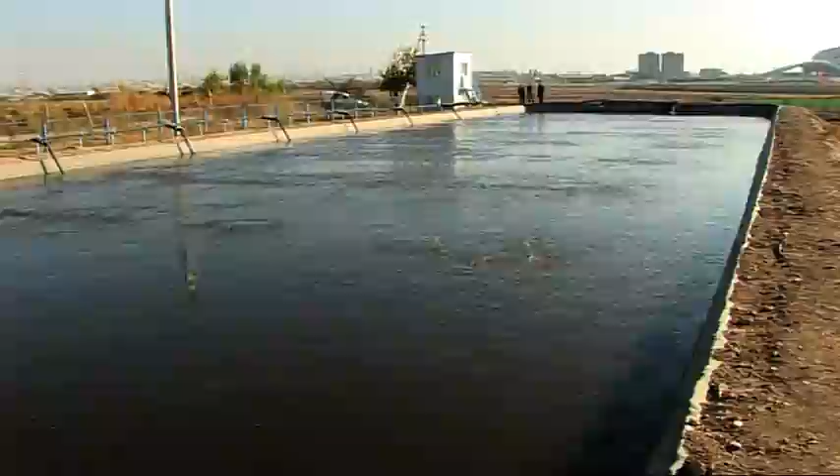We are now in Parakar community of Armavir region, where a non-conventional domestic wastewater treatment system was constructed within the framework of the Global Environment Facility Small Grants Program and community funding. Domestic wastewater treatment allows restoring of degraded community farmlands and protecting underground water resources.

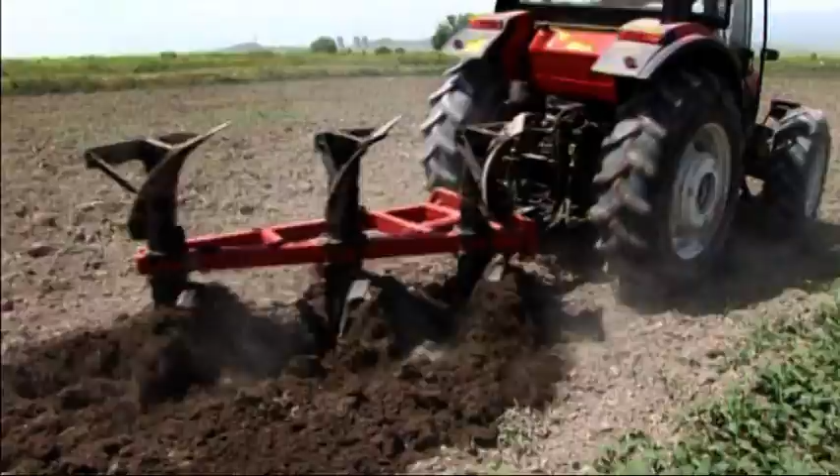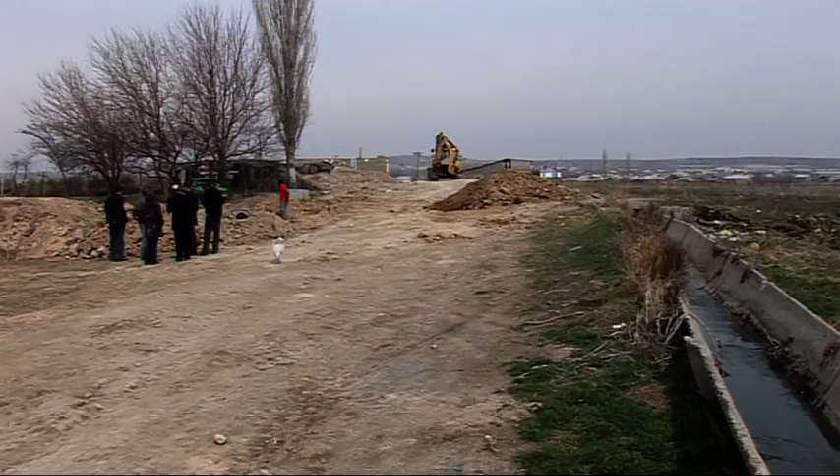The local population is mainly employed in the service sector. All of them have privatized agricultural lands, of which only 5% is cultivated. The remaining agricultural lands are not tilled and exposed to degradation from year to year. The main reason for that is pollution of irrigation water by domestic wastewater.

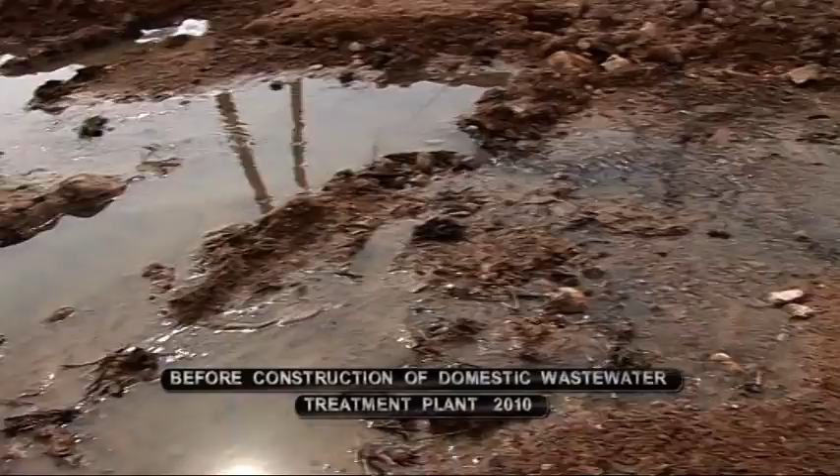Parakar community, which has about 10,000 residents, is connected to sewerage system. That is, it has collectors and wastewater system. However, in the past, wastewater was pumped to the treatment plant of Yerevan by means of 2 pumps. Those pumps have not operated since the independence. The pump stations are completely destroyed and not subject to repair. Wastewater is fully spilled into the village.

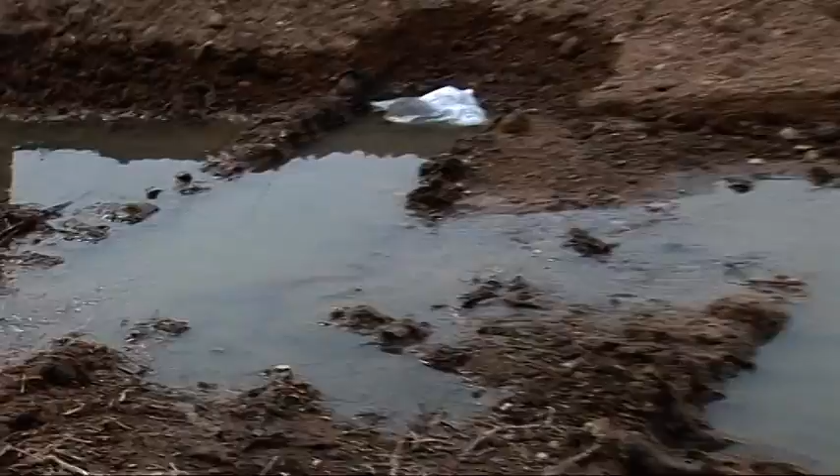It passes through the village, fills into the irrigation system, irrigation canals, and because of this, considerably large agricultural lands are not irrigated. These lands degrade and remain uncultivated. Along with pollution of irrigation water, stench, unsanitary conditions exist in the village. And that was the reason that with the initiative of the mayor, as well as Parakar Foundation, it was proposed to jointly implement this project within the framework of Global Environment Facility Small Grants Program.

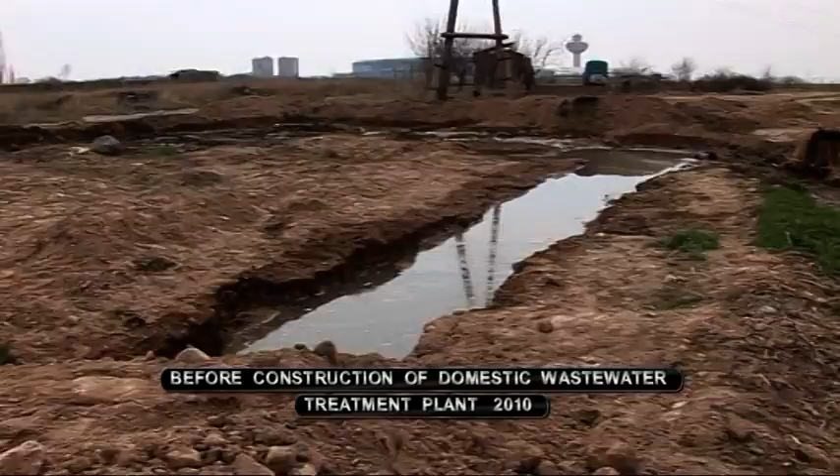For many years, the irrigation canal has been almost fully filled with sediments from wastewater. The latter often flowed out the canal to adjacent areas, making foul odor and anti-sanitary conditions. I have been living here for 27 years. This situation was present since the moment I came here. I have been cleaning the canal, the manholes all the time, with a shovel in my hand to clear out the water. There is no salvation.

It is very unpleasant for me as a resident. This sewerage wastewater, especially when the days become warmer, this foul odor has terrible impact on people, children. Even the children are going to school through this foul odor, the wastewater. It is very unpleasant. We would like this sewerage to be treated, which is the best option.

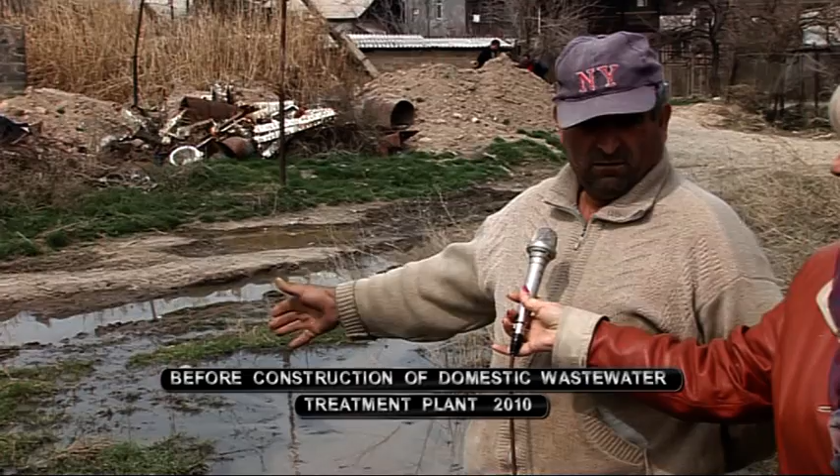It is already 30 years with this situation of the sewerage. After the revolution, we have the same story every time. And this sewerage has caused damage first of all to me. All my trees have withered. Please go into the yard and see the situation there. It's terrible, horrific. All I had totally dried out. I invested so much there and everything dried out.

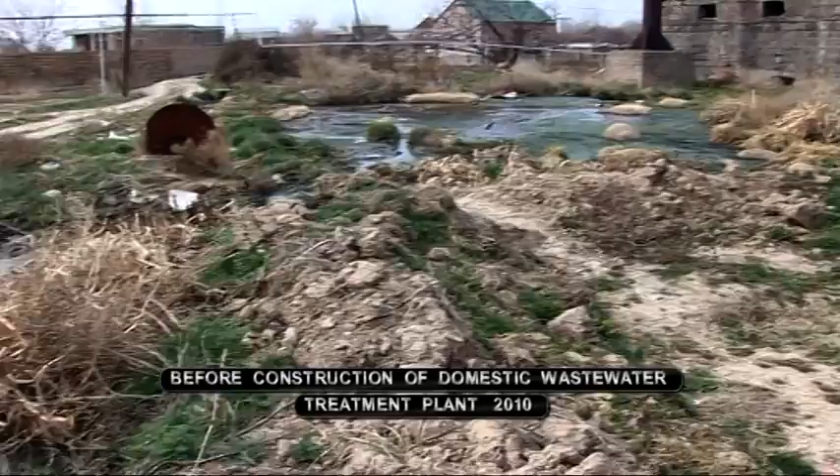Well, you know, it is really a disgraceful situation in the sense that we have such a lake directly adjacent to the school, and you can see yourself what is in it. In fact, the entire wastewater of the upper part of the village is filled into the area of the village school. Of course, it continues its way to the houses downstream, which are still in the same condition. But the school, we now have about 500 pupils, and our students, teachers, parents have to face this impurity every minute. Here you can see through this place our children come to school, just near this dishonor.

The critical situation seriously worried the community head and the administration, since, after mixing of the domestic wastewater with irrigation water, the latter was not used for irrigation purposes, and about 100 hectares of agricultural lands remained uncultivated.

Flowing out the irrigation canal, the wastewater contaminated the cultivated lands, degraded qualitative indicators of the lands, and jeopardized food safety of the population. During summer, wastewater in the community environment posed a real risk for breakout of intestinal and epidemic diseases.

For that reason, as early as 2010, the community head Samvel Vartanyan, in partnership with Parakar Benevolent Foundation and Country Water Partnership NGO, initiated and developed a demonstrative pilot project for domestic wastewater treatment.

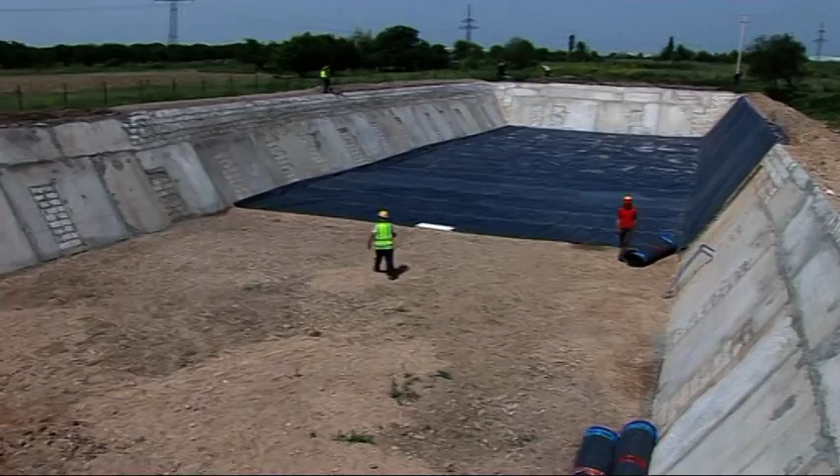The project implied application of a lagoon type of wastewater treatment system for the first time in Armenia, which has a broad application abroad and is relatively cost-effective. This wastewater treatment technology was adapted for Armenian conditions, and the treatment structures were designed by Ginge Engineering Consulting Company.

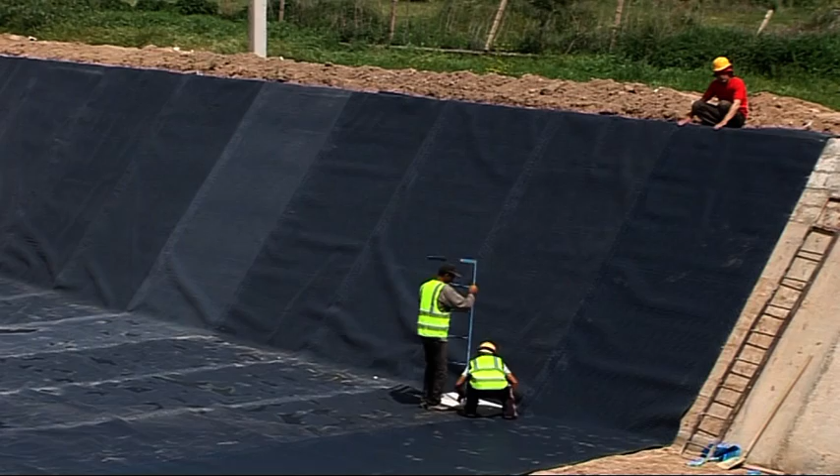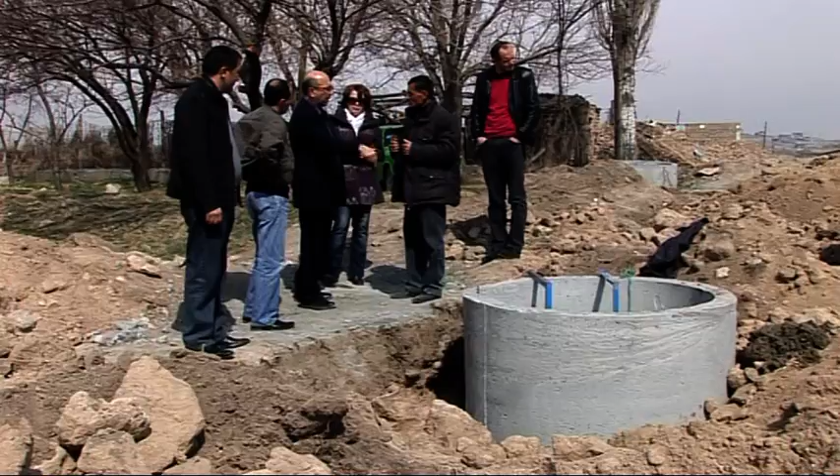It was a very pleasant surprise when in 2010 the Country Water Partnership NGO invited us to take part in the Parakar Wastewater Treatment Plant design project within the framework of Global Environment Facility Small Grants Program. We accepted the invitation with pleasure and started to work.

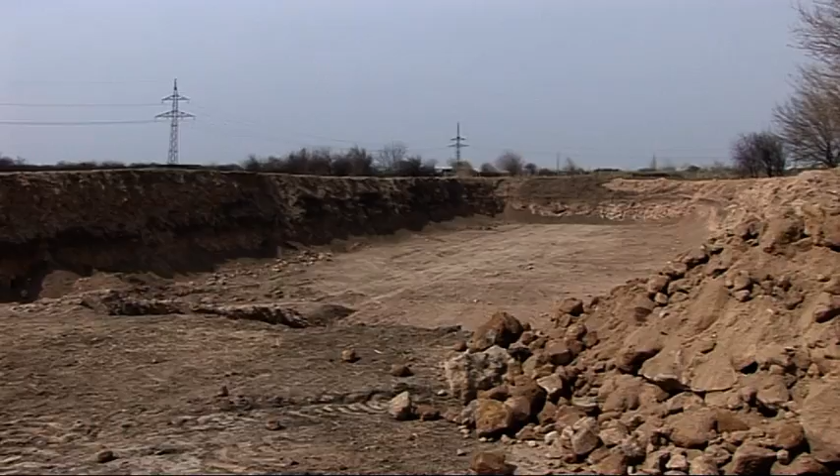Our experts studied the land area allocated for Parakar wastewater treatment plant, its sizes, area, location on the plan, and other data such as wastewater flow, the extent of the community sewerage system, and most importantly, the purposes of wastewater use after treatment. After analyzing the received information and our data, we proposed to apply biological treatment lagoon ecotechnology for Parakar, which envisaged wastewater treatment in 2 biological lagoons.

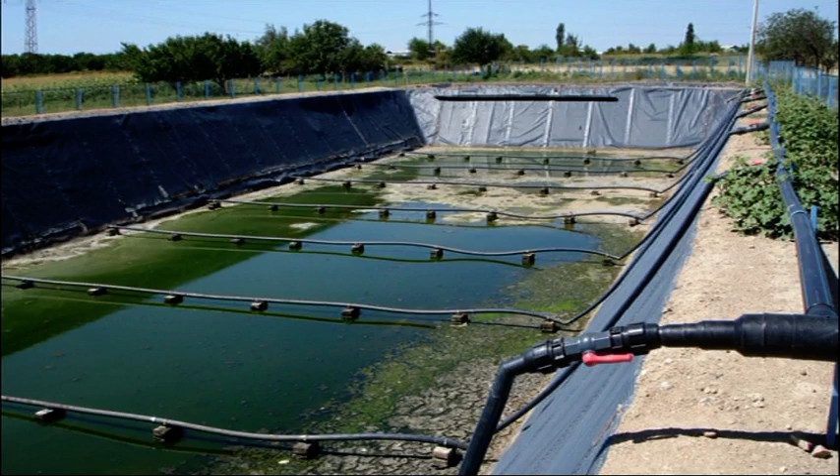Therewith, the treatment would be with artificial aeration in the first lagoon and with natural aeration in the second lagoon, where the settling process would be mainly implemented. The plant would have also certain auxiliary structures such as pump station, air blower station, air distribution system, etc.

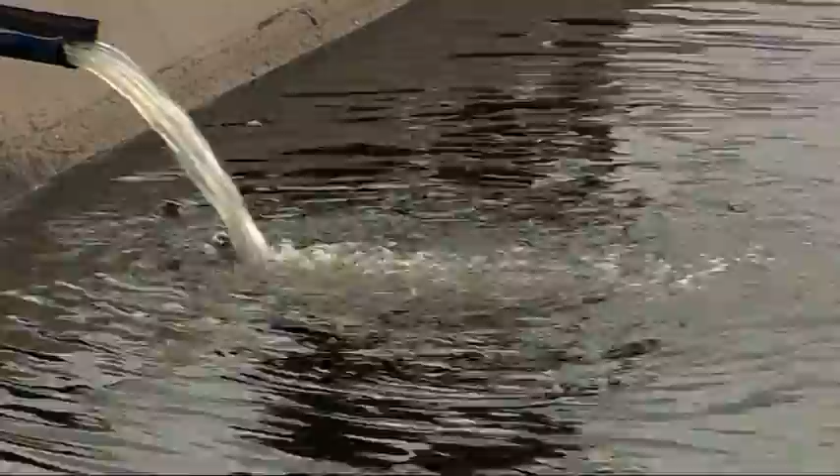It's worth mentioning that all organizations taking part in the project have attached importance to this initiative and made monetary and in-kind contributions to the project. And this is probably the only project within the framework of UNDP GEF Small Grants program where the community's monetary contribution makes about 80% of the total project budget.

Since 2001, at different times, we have applied to the government of the Republic of Armenia and different non-governmental organizations. We applied to allocate funds from the state budget to restore the previously existing system. But it required a huge amount of money. Even only to change the pipeline, an amount exceeding $1.5 million was required.

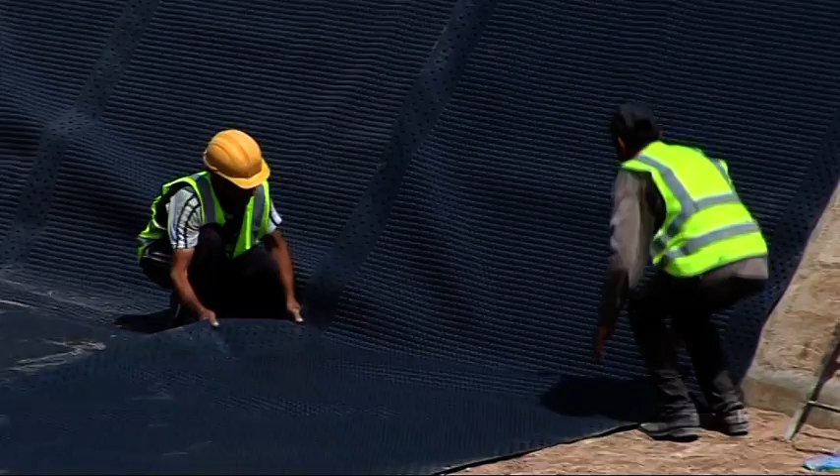And since 2009, we have already started to look for other possible ways to solve the problem of community wastewater disposal and treatment. In 2009, after consultation with Mr. Yerityan, the Community Association President, and Mr. Mesropian, Director of Ginch Company, we decided to construct biological lagoons by which it is possible to treat the wastewater of our entire community.

The works started in 2010, and today we can already proudly say that we are the first in Armenia that have a treatment plant, the operation of which will make the village free from stench, from loading the irrigation canals with wastewater, and as you can see, our neighboring areas are not cultivated.

The lands have not been cultivated quite a long time because of the irrigation water being not available. We used to have the best grape orchards here, good pear orchards, and now there is nothing left. But we can already see a small green area in our neighborhood because the water is already there, and the water is everything for villagers.

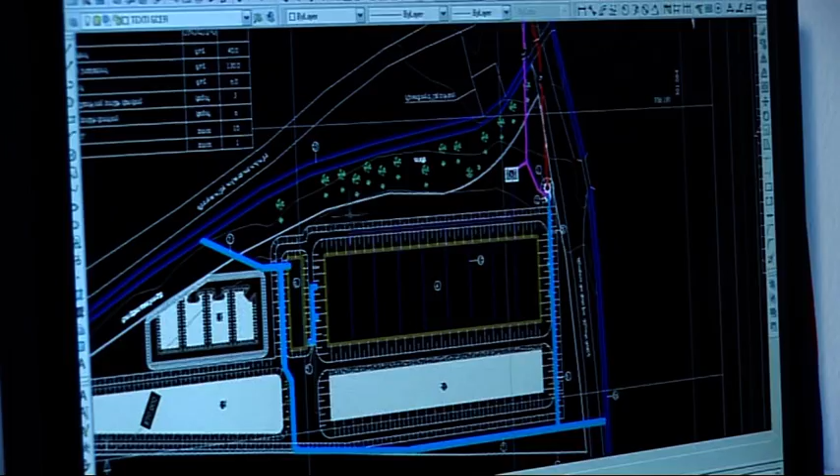This project is of great importance for Parakar community because it solves a number of problems such as environmental, health and socio-economic. Thus, as a result of the project implementation, the wastewater flow into the environment, including agricultural lands, which were not developed in the past for this reason, will be excluded.

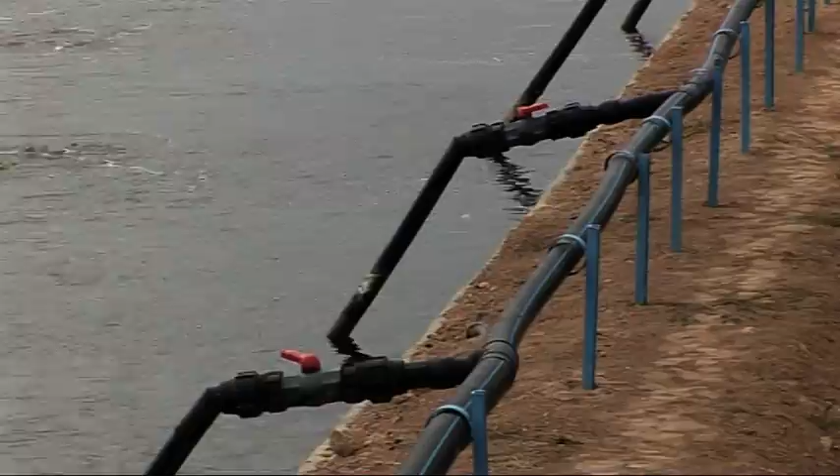Unlike the option developed under the general plan of the community, according to which the domestic wastewater of the community would be pumped to the collector of Yerevan's southwestern district and then removed to Aeration wastewater treatment plant with preliminary estimated value of $1.5 million, this approach is rather inexpensive and more acceptable from the environmental point of view.

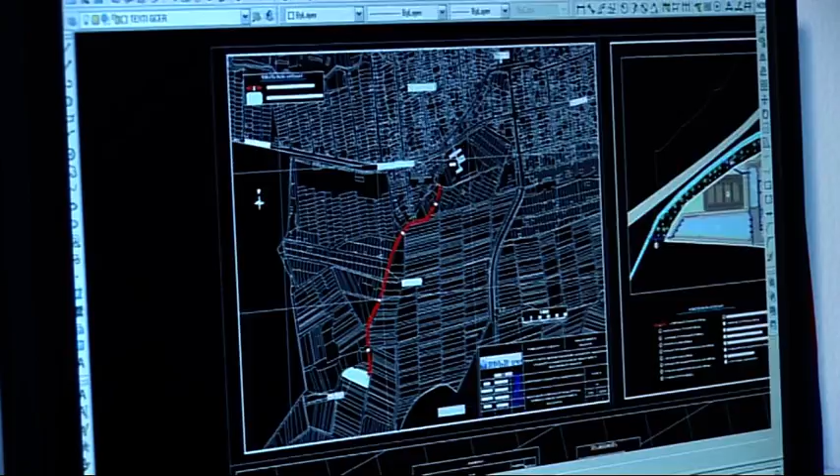The goal of the project is to collect, remove the community's domestic wastewater and to treat the wastewater, making its quality in conformity with the requirements for irrigation water. With this purpose, a sewerage collector with around 1 kilometer total length was constructed, as well as 2 observation chambers at the end of the collector, one of which serves for the metal screen and the other for submerged pumps.

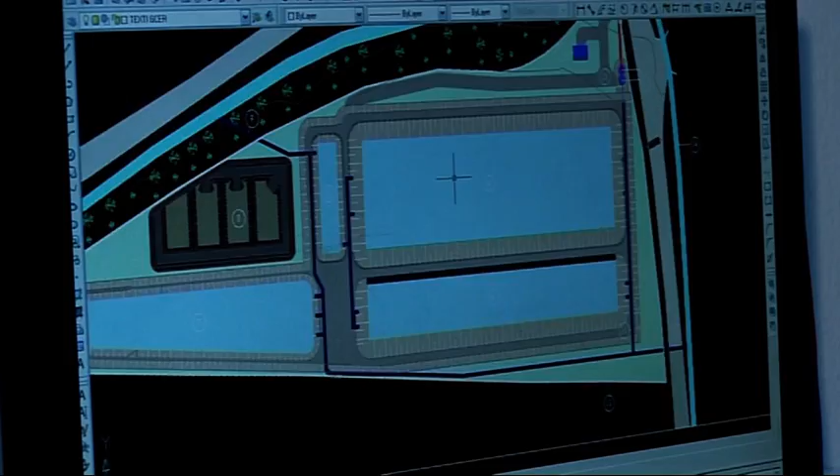Wastewater is treated from relatively large particles by means of screen and is pumped up to 6 meters by pumps. After being pumped to 6 meter height, wastewater flows into biological treatment lagoons through distribution system. There are 2 treatment lagoons. In one of them, artificial aeration takes place, and in the other one, natural aeration and settling of particles, removing the treated wastewater to irrigation canals.

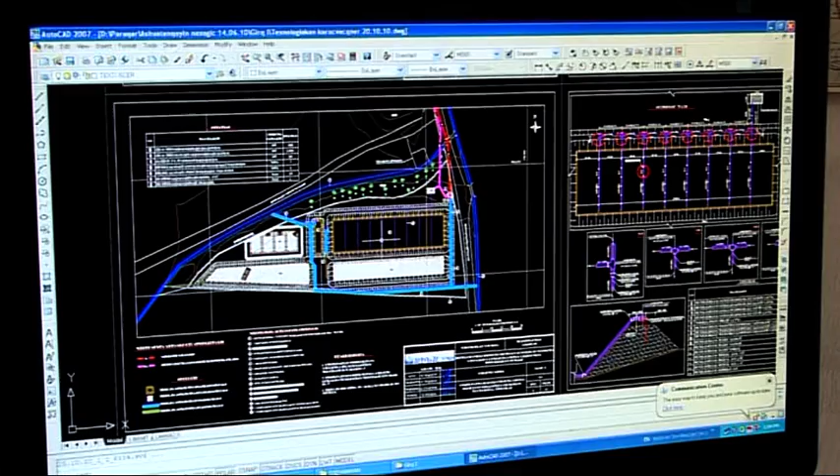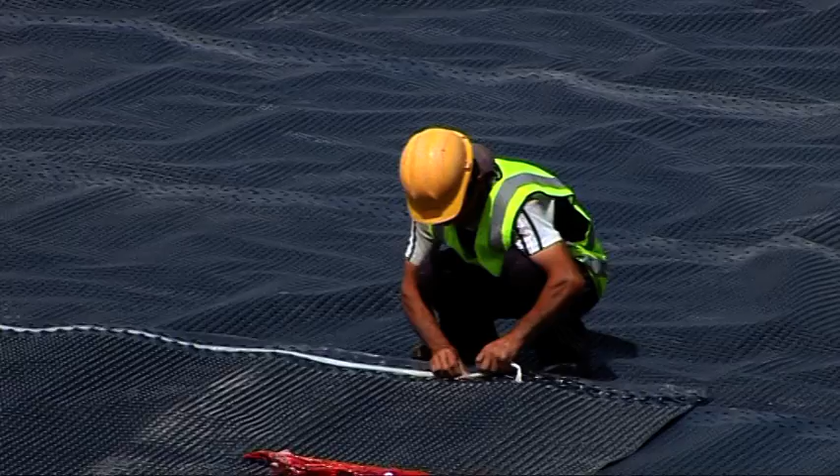The biological lagoons are earth structures with natural basement, and accordingly 3,500 and 100 cubic meters operating capacity. In order to prevent wastewater filtration, the floors and walls of the lagoons are isolated by means of water-repellent polymer membrane, with appropriate development of the walls and floor. Wastewater flow from the first lagoon to the second one is implemented through the collecting canal, and the flow from the second lagoon to the irrigation canals, through pipes.

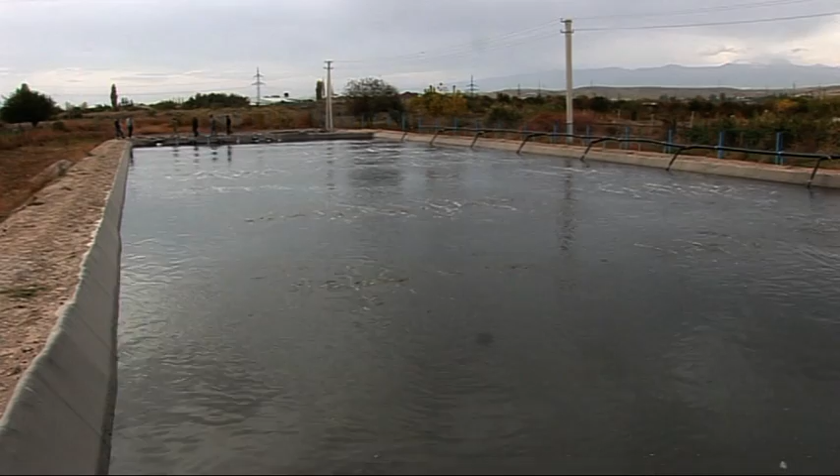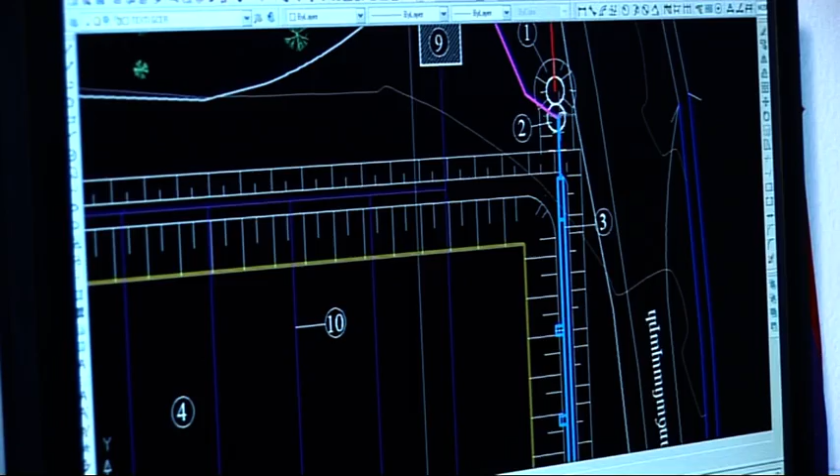As I mentioned, for increasing the wastewater treatment efficiency, it was planned to carry out artificial aeration through air blowers. For this purpose, a two-story building was constructed within the plant area, in the first floor of which the air blowers are installed, while the second floor serves for the operating staff. By means of air blowers, the air is blown through polyethylene pipes to the distribution network installed at the bottom of the biological lagoon, representing perforated pipes located at certain distance from each other.

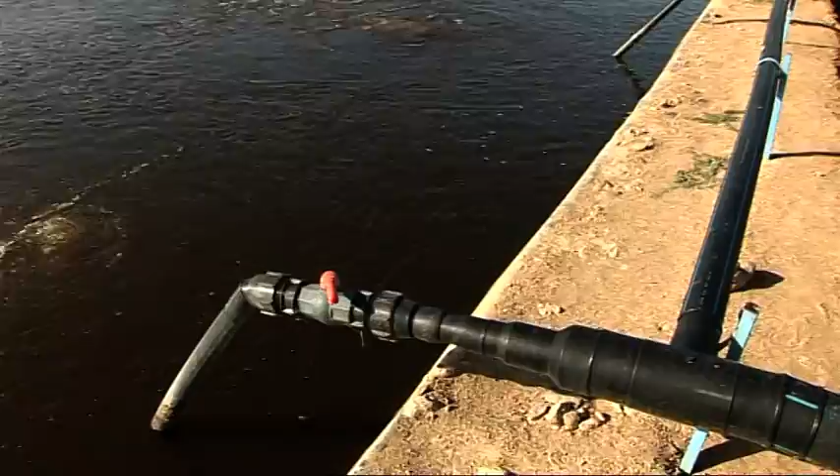I would also mention that this project was proposed to be implemented stage by stage. In the first stage, the sewerage collector, aerated and settling lagoons, air blowers building and aeration system were constructed. In the second stage, expansion of the treatment plant structures is planned. In particular, increasing the volume of the biological lagoon, construction of a sludge bed, planning of water areas for fisheries.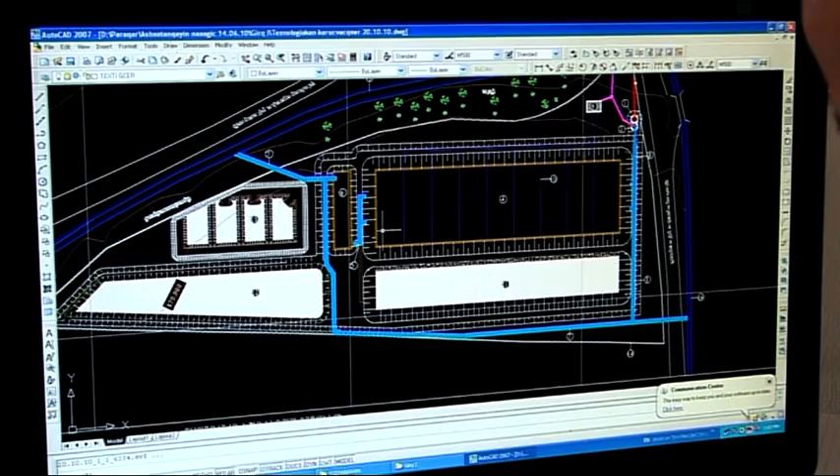I would like to mention one more thing, which was present at the very beginning of the plant construction project. During each meeting, the fact of existence of odor from the wastewater was highlighted as an argument. And all our evidences or efforts to convince did not seem very impressive.

And now, when the plant has started its operation, the same people who had doubts and were unbelieving in this regard now are convinced and wonder that the odor near the plant and even next to the lagoon where I am standing is absolutely missing. This is the result of the implementation of the plant's biological treatment process, that is aeration. Artificial aeration in such plants is a most important and primary task to provide the technological process.

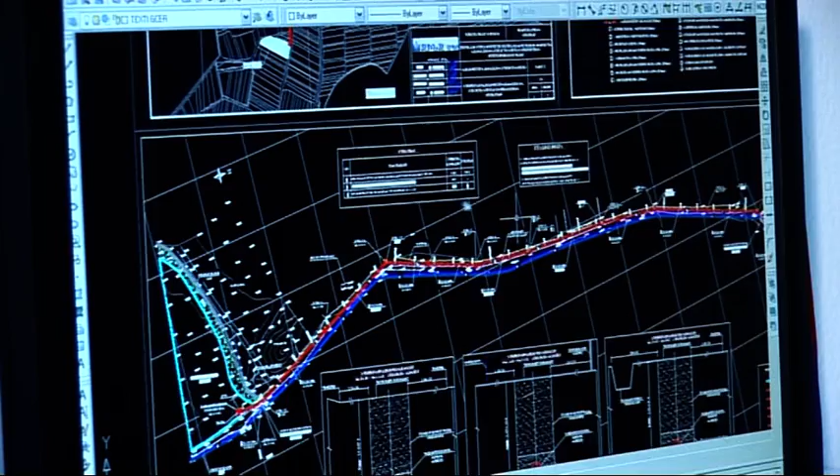The construction works for wastewater collection and treatment facilities started in October 2010. 882-meter long, 250-millimeter polyethylene wastewater collector and 17 observation chambers were constructed. The mechanical structure of the plant was constructed.

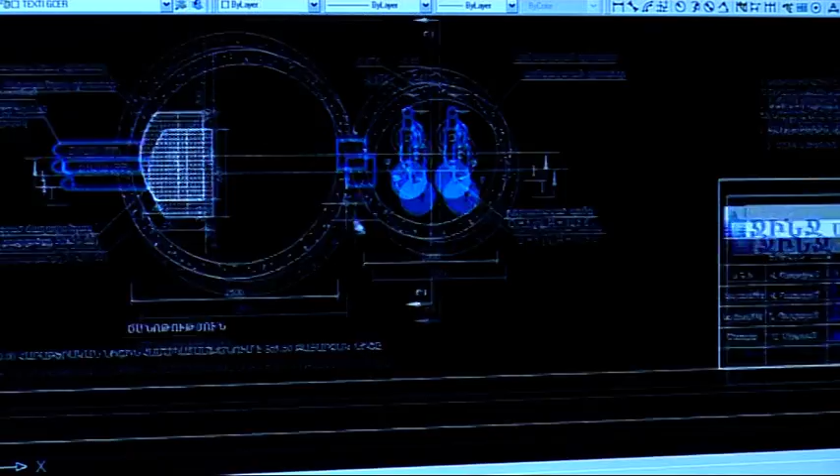Screen. Pump station with 2 pumps installed. One is horizontal with cutting machine, submerged grinder pump, and the other is vertical, single stage, made from stainless steel, submerged, 3-phase engine with automatic switching as a spare pump.

Air blowing node where 2 air blowers of Italian production were installed, an air vent system which evenly distributes air throughout the lagoon area. First biological lagoon with 5,350 cubic meter operating capacity, which is moisture-proof with aeration pipes passing through it. Sedimentation lagoon with 112 cubic meter operating capacity. Fence, a guidepost.

All parties participating in the project highly appreciated the project importance. The project budget also evidences this. In spite of the fact that the project was implemented with financial support of the UNDP GEF Small Grants Program, all project participants, including the community, Country Water Partnership, Ginge Limited, considering the importance of the project, had their monetary and in-kind contribution to the project.

Thus, we got a total of $50,000 under the grant program, while our program cost was about $220,000. The remaining are the investments, of which 80% was made by the village administration.

During the project implementation, special attention was paid also to public awareness raising and formation of appropriate attitude of population towards the new wastewater treatment technology. By means of information leaflets and roundtables, the community population was informed about the project goals, the implemented works, and the anticipated outcomes. The population was informed also about the positive impacts of the project on the environment, health, and social-economic condition.